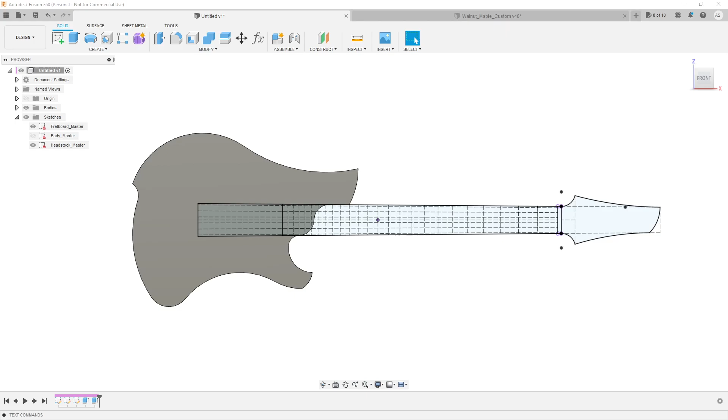Let me pull up my model here. I'm really hoping to get the majority of this body modeled and then start working on the neck transition, this back relief cut and the neck transition. Hopefully I'll have time to do all that.

So what I'm going to try to do, when it comes to shaping the body, is not do quite as much explaining as I normally do, since I've covered a lot of that in the last episode. Hopefully today we can really put some work in and get the body done.

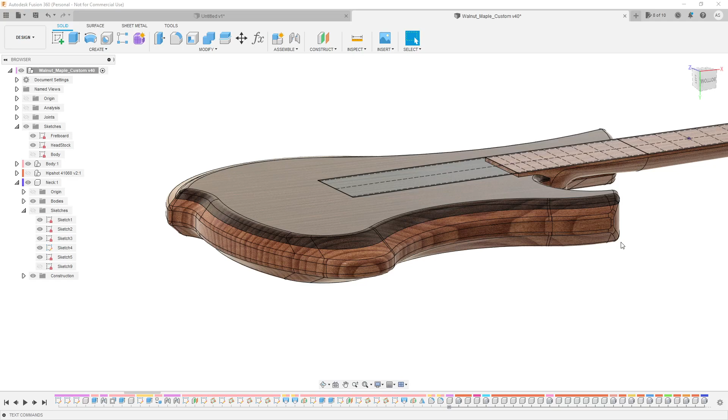The keen-eyed observers among you might notice that my neck is sitting a little bit proud of my body and my fretboard sketch. In episode 2, we actually extruded it directly from the fretboard sketch. Those two are coplanar, and that presents a problem because the neck typically wants to sit a little bit proud of the body, since you'll also have the 1/4-inch fretboard on top.

And that is, if you're using a Hipshot bridge like I mentioned in the first or second video, that'll give you the right string height. So what we actually need to do is come in here and correct that - we need to extrude this down away from the fretboard sketch by at least 1/8 of an inch if you're building the body out of one material.

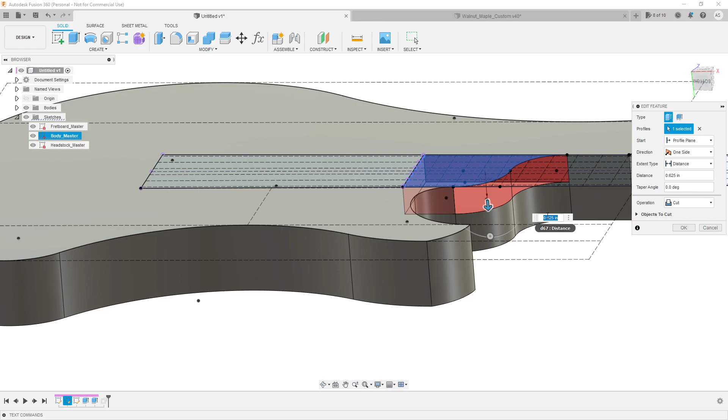And if you're building the body out of two materials like a laminated top, you'll want to do 1/8 of an inch plus the thickness of your laminated top. So if you'd like to just do one style body, bring that down 1/8 of an inch, and then come back to your neck pocket and bring that down an additional 1/8 of an inch. Oop, I messed that up.

So we'll go 0.75. What that does is maintain our 5/8 depth on the neck, but it also brings this down by about 1/8 of an inch, so the neck sits a little bit proud.

For those doing the split top or laminated top, we need to come back to this offset, and we'll go the thickness of the material for the laminated top plus 1/8 of an inch. So if we use a 1/4-inch laminated top, we'll go -0.375.

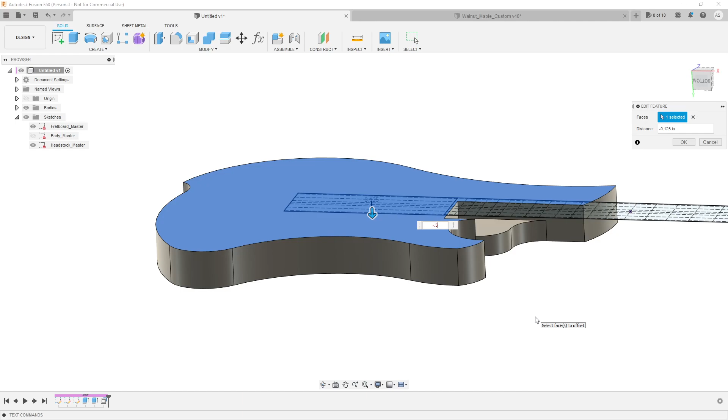Creating the laminated top is actually very easy. We're going to create a new component, so let's go create new component, just hit OK. Then we're going to sketch on this top surface of the body that we just offset and corrected.

Let's click on the main surface, and notice it's not picking up the neck pocket, which is good. So let's hit P for project, bring that into our sketch, hit Q for press pull, or solid extrude, grab that face, and come up the thickness of your laminated top, so 0.25.

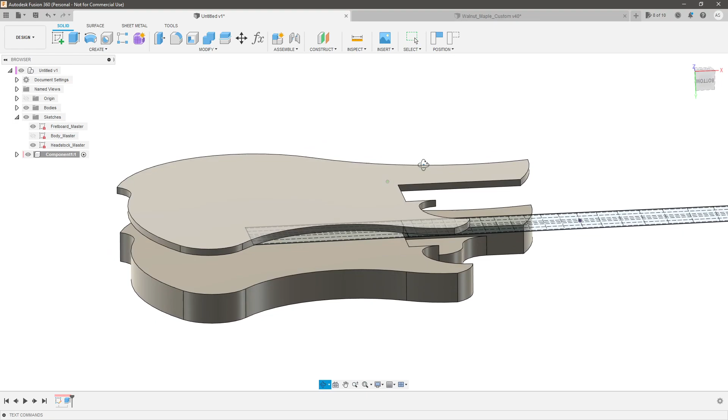Now you'll notice we actually have two separate pieces here, and this already has the shape of the body we created in episode 2. You'll notice, however, that it can move, so we need to make sure that's joined to the body.

Click that face and this face, come up, hit assemble joint, and it'll automatically snap because it's exactly the same shape, it'll snap on center. So we can just hit OK.

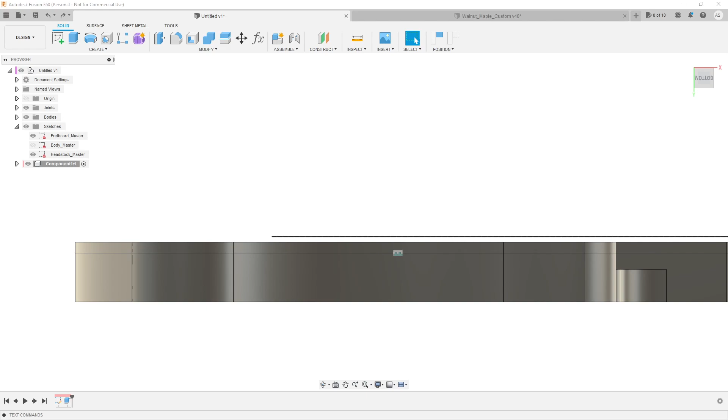So now we've actually got our laminated top, our bottom, and we've got the gap here for the neck. To make things easier going forward, I personally like to apply either a color or an appearance to that laminated top, so when I'm cutting through everything I can clearly identify what portions I'm seeing. Because sometimes when everything's the same color it all blends together and you lose track of the proportions of everything.

So let's hit A on our keyboard and let's grab an appearance. You can apply a wood appearance at this point if you'd like, or whatever material you're using, but I'm just going to pick a color, so I'm going to grab green. Let's go paint green. Now I'll change this later, but what that does is give us some really nice contrast so we can clearly visualize what's happening in the cut.

All right, let's start cutting. First things first, I'm going to lay out the rails. Like in episode 2, I prefer to do the rails first when it comes to the body, but you can draw the profiles if you'd like, if that's the direction you want to go. Like I showed with the 3-point plane method, that seems to work really well for the body, so let's go ahead and do that.

So let me hit sketch, and we'll sketch on top of the laminated top, or on top of your unified surface if that's the direction you went. First, before we do anything, click the surface, hit P, and project that into the sketch. Now let's hit arc, and let's start getting a rough shape in place before we add any dimensions.

So there, those two are tangent, but it doesn't know where it is in space yet. This line can move, this point can move, this point can move, and these two radiuses haven't been defined yet. So let's give this a radius of 5 inches.

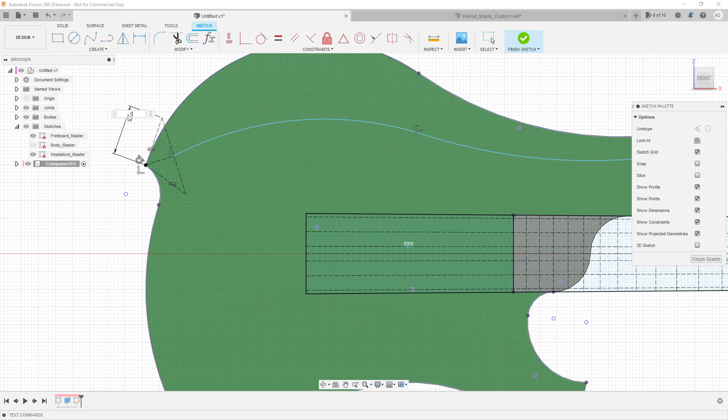That point is going to end directly in line with where these two arcs meet. Let's say if I offset those two, and let's go ahead and give that a dimension of, let's say, 1 inch. And so that's where that line is going to start.

Now we can probably start messing with the constraints here. So let's dimension from this point to this point. Let's do 0.625. And let's give this a radius, let's say 5 inches. I want it to be up a little higher.

That's starting to look pretty good, but where are we missing? It's not black yet. Okay, so this radius can still change, and this point can still move. I bet if I just defined that point, it'll fully constrain everything.

So let's dimension between these two. Let's do 1 1/4. And I bet it can still move down. Yep. So let's dimension between those two, 1.25. Perfect. Okay, so now we have a fully defined top rail.

In order to save the amount of sketches that we're going to make, because we're going to make a lot of sketches in this design, I'm going to draw both rails on the same sketch. You can actually do that and just use a portion of that rail or a portion of that line for the rail. So let me start the next one.

So let's go here like that. Start getting some rough lines in place like we did before. And let's come all the way down to here. Let's delete some of these tangencies real quick, so that way we don't get messed up.

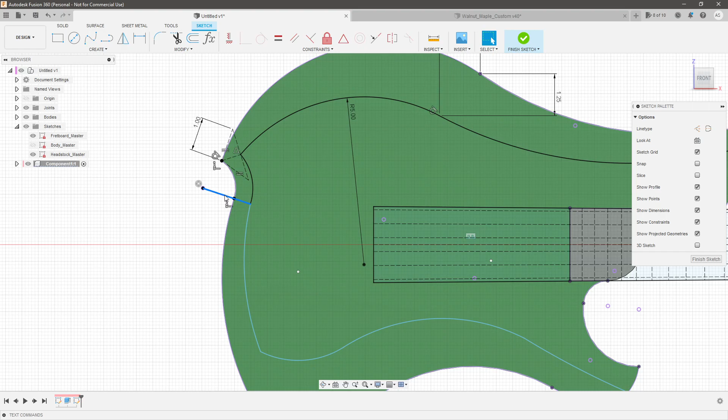So that's actually what I'm going to do, is I'm going to draw a line from here and a line to this point. Make these both construction lines and make those collinear. So that way it's drawing a straight line from the center of that arc through the edge of this one and into the edge of this one. And that's giving me a nice concentric shape there, easy to define, which is nice.

Okay, so let's start working on the bottom. The more that I'm looking at this, I actually am just going to delete these two right here, because I have a feeling that as I start giving those dimensions, they're going to start creating big circles and going everywhere. So let's define our two endpoints first, so that it's much easier to constrain the ones in the middle.

So let's go ahead and make this one concentric to that. Let's bring that up, and let's define the distance between these 2 points. Let's do the same thing we did above as 0.625. And let's make this vertical to here. Okay, so that's fully defined.

Let's make these two concentric and do something kind of similar. I'm going to leave this one open for now because I don't know where I want the bottom of that arc to land. So let's hit arc, and let's draw between here. Let's make sure that's tangent. Yep, that's tangent to there.

And let's draw from here to here, and let's do that, and let's make these two tangent and these two tangent. Okay, so now we kind of have the same situation we had above, where this point can move and that point can move. So where do we want that to fall?

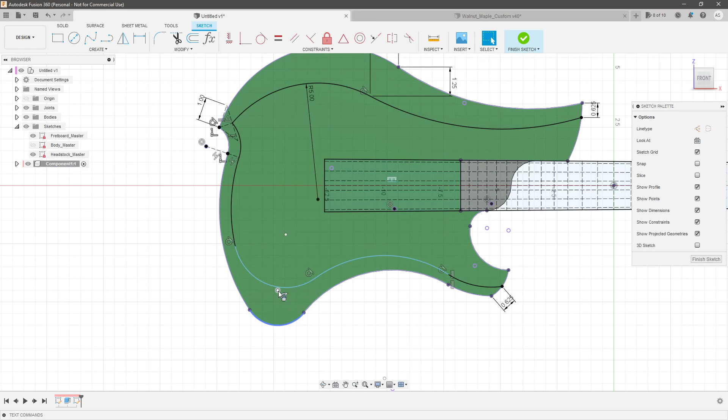So let's find some easy points that we can identify here. Let's make the center of this arc vertical to the center of that arc. And then let's draw a line from here to the edge and make these two tangent.

Okay, so now what we need to do—actually, I changed my mind. So we're going to delete this line. And what we're going to do is we're just going to dimension this radius here. I think that's going to be way easier. So let's give that, let's see, 2 inches. Nope, that's too much. Let's do 1.75.

That looks pretty good, actually. So we've got a nice cut here, and it gets a little bit bigger down at those bottom radiuses and comes in. I'm pretty happy with that.

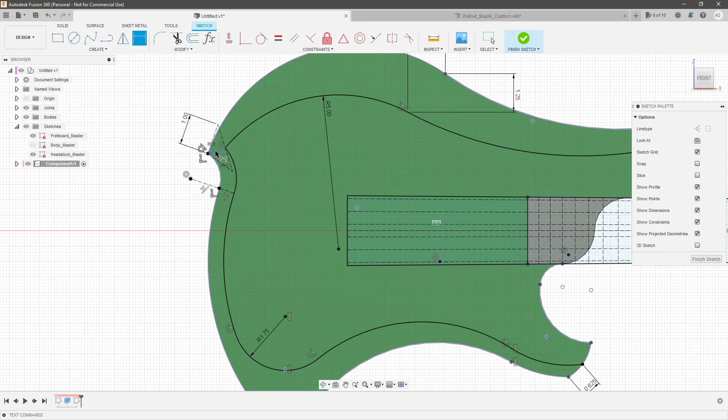So going over this again, I know I rushed through this, and I mentioned in the beginning of the video that I'm going to rush through some of this, but basically I drew some arcs, and I clearly identified where this point that's just in midair is going to land, and then I started constraining everything.

That's going to give me some pretty nice rails to work with. So let's go ahead and hit Finish Sketch. And just like in video 2, we now have a rail here, a rail here, and a rail going all the way around here. That's going to set a nice foundation for us to draw some triangles and cut through.

So the next thing we need to do is we need to establish our plane somewhere lower. So let's go ahead and hit Offset Plane from the top surface.

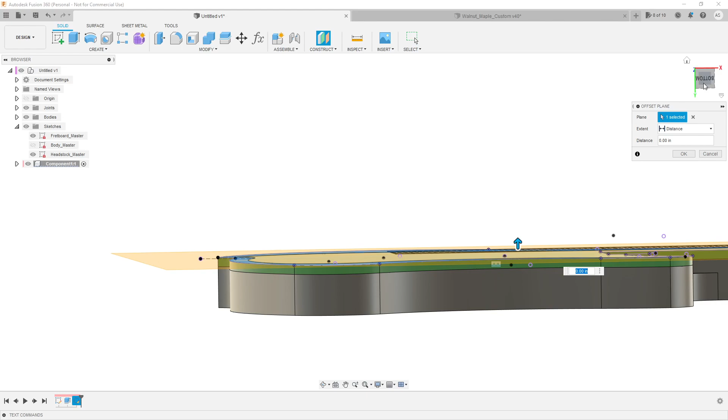And we know since we're doing a laminated top, we want it to cut through both surfaces, so it at least has to be the thickness of the laminated top. Let's actually just double that. Let's go to negative 0.5 inches. Hit OK. Now we've got a surface that'll cut through a 1/4 inch of the base material and a 1/4 inch of the laminated top.

Let's go ahead and hit sketch. Let's click. Let's actually select these lines instead of the face now that we have multiple bodies there. Hit P for project.

And now we've got our rail here on the bottom. So we've got 3 points here, potentially 3 points here. I might need to add another point there. Same thing here, same thing here, all the way around. Probably need to add a point there and a point there.

So let's go back to our sketch. Let's set ourselves up for a loft. Actually, that's the other one. Okay, so let's make sure we add some points.

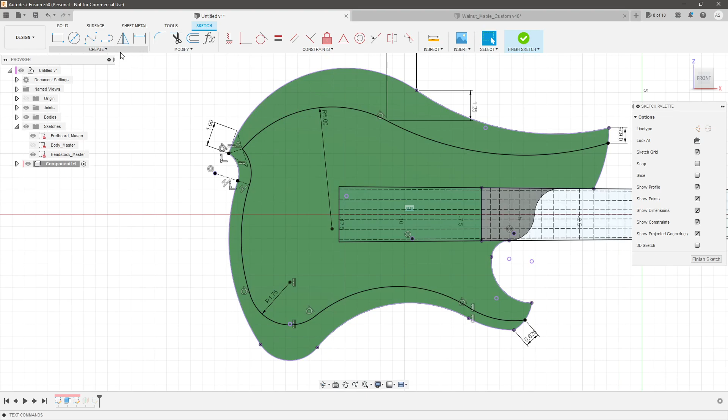This is probably not necessary because you can typically grab off these locations, but I want to add a point to be sure that those are all going to land where I want them to. So let's add a point here. Add a point, no. Add a point here. Add a point there. So we have a triangle here, triangle here, triangle there.

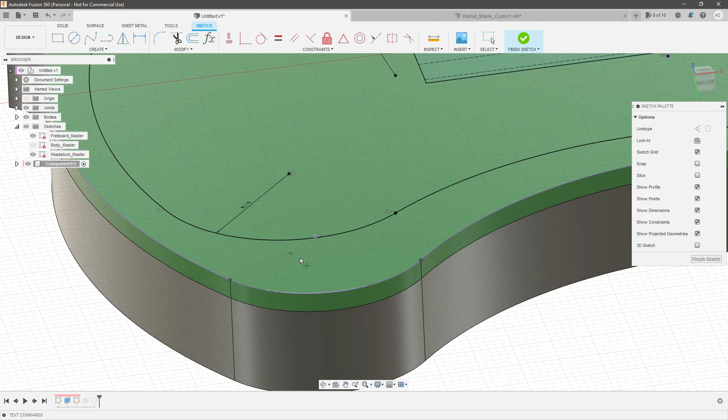This one might be a little tricky where I can add a point to. I'll have to come back to that. Okay, hit finish.

And let's go back to this sketch. And let's make sure we have enough points there. So yep, we've got 1, 2, 3. This one might get a little tricky. We'll have to play with that a bit later. 1, 2, 3, 1, 2.

I didn't add one there, so let's go back. Add a point to here. So now we've got 1, 2, 3. We've got 1, 2, 3, and 1, 2, 3. Okay, let's try that for now. And if we need to come back and fix this one, we can.

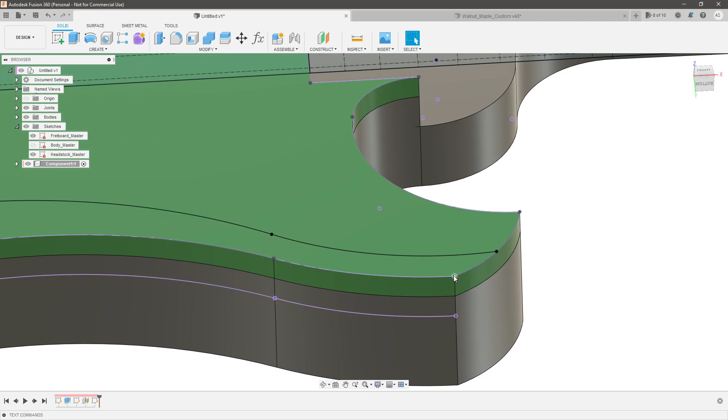So I'm already noticing something. If I create a triangle between these three right here, let's look at this from the top view. Imagine I drew a straight line between these. That's actually going to clip off this little radius here. So I'm actually going to have to extend these lines out a little bit, so that way the cut starts on the outside of the body and goes in rather than starts on the inside of the body, because then I'll have a little bit of material here that never got cut.

So let's go back to our sketch. Actually, the first one. There we go. Create 2 more arcs. Let's draw like that. Tangent and tangent.

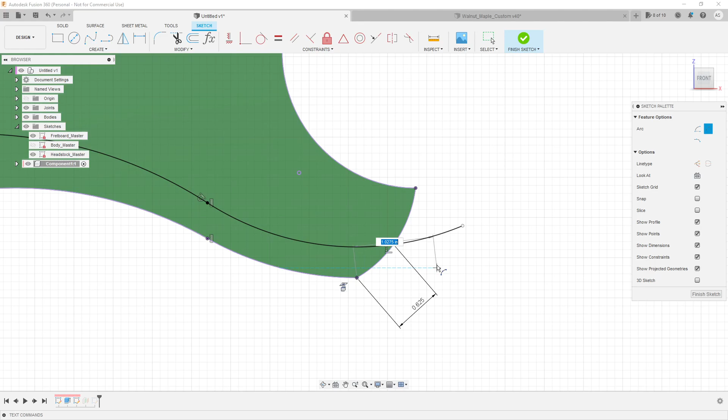Let's make sure these are concentric. And let's make sure this one is concentric. Oh, I'm just going to delete that one and try again. Create arc. Make sure this is concentric.

There we go. And let's go ahead and make these 2 vertical to each other. So vertical. Okay. And then let's define how far away from this surface is that going to be. Let's just say 0.625. Okay.

And then let's come up here. I don't think I need to do it on this one because this one comes tangent, but I'm going to do it anyway just to be sure so I don't have to do extra work later. So I'm going to extend these ones out as well. Come out here. Let's make these tangent and concentric.

Ooh, okay. There we go. Bring that back in.

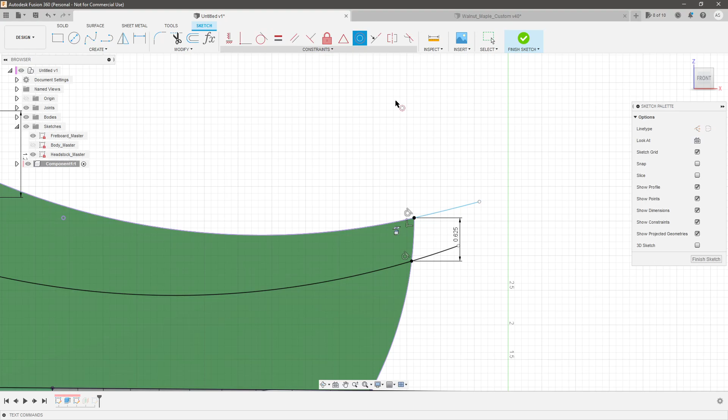These two are tangent, that's already tangent, and concentric. Make these two vertical and define from our shortest point, 0.625.

Now we need to go back to the other sketch and make sure those are also projected in. So project, and project.

That way on the endpoints we have three points here and three points here. I think we're almost ready to start cutting. This might be the most tedious step, but I'm going to go ahead and add in the planes and start connecting all the dots.

Let's construct a plane at three points from here, here, and here. Hit OK. Construct plane through three points between here, here, and here. OK, I'm just going to go ahead and do this to every one of these.

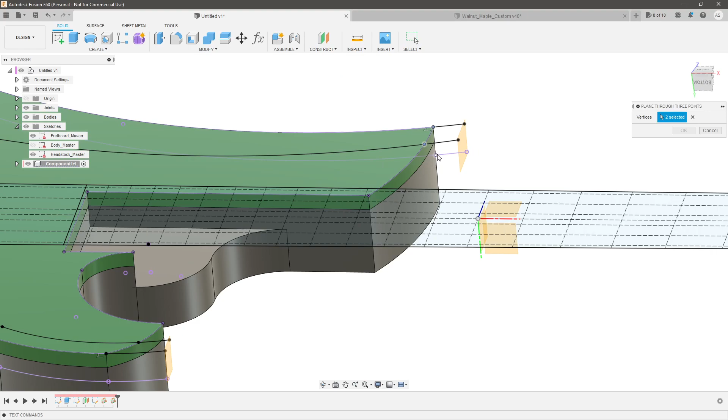Now, you might not actually need to do that. You might try it first by seeing how it interacts without having to do that. But I'm going to go ahead and just draw it at every point where I have a solid three points. So bear with me here for a second.

And through three points, these three, between these three. We're going to skip that one for now, still might have to come back to it later. Through three points here, here, and here.

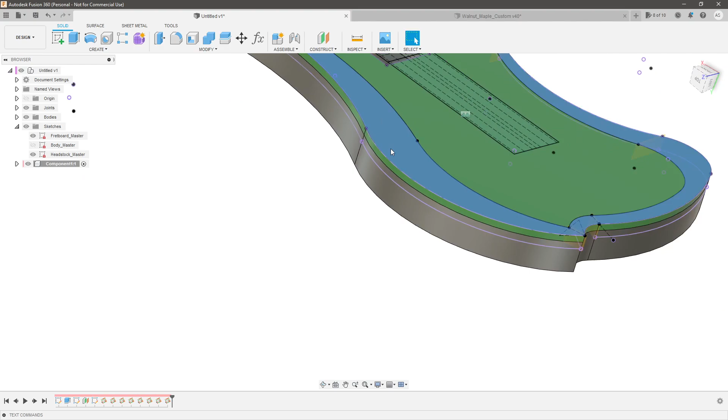Plane through three points here, here, and here. Come around, do these ones. Three points. Oop, undo.

Let's hide the body, it's not letting me select it. Come on. Construct plane through three points here, here, and here.

There we go. Okay, that should give us more than enough to get started, and then we can see how it's interacting a little bit later. So let's go ahead and hit sketch on this one and connect the dots.

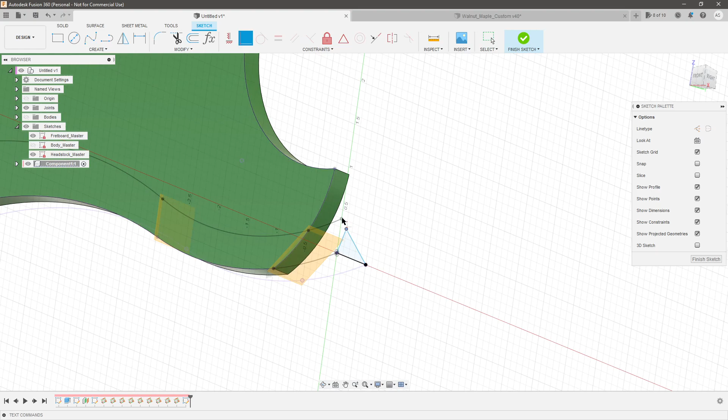There we go. Oh. I apologize if this is going to take a little while. This is the most tedious part of lofting, in my opinion, getting all these connected. So bear with me here. I might do a time lapse.

Phew, that took a while. Thank you for bearing with me on that. So let's go ahead and try to loft.

Now, one thing I want to note before we do this is that I'm going to do this in two lofts, and I want to explain why. So lofts really like to have a smooth trajectory from one place to another. They don't really like to change directions abruptly.

You'll notice I've got straight tangent lines going all the way through. They're all connected up until here, and then it goes a vastly different direction. That's a good indicator for me that I need to do this in two lofts.

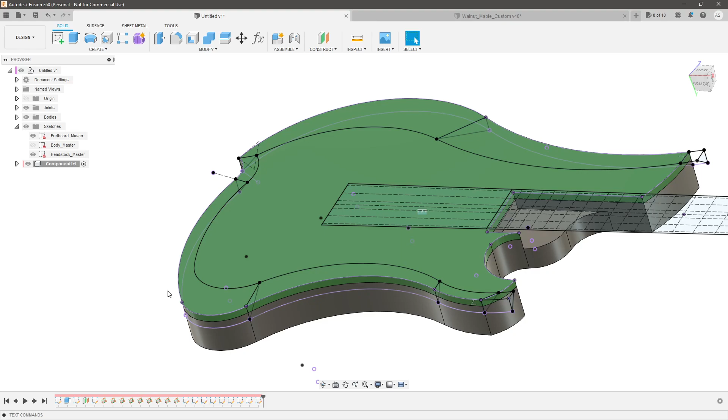There are ways to do that in a single loft, but generally not when you're trying to follow a path like this. If you were to do it that way, you'd probably want to use this whole surface as one of your profiles and then draw construction lines down vertically to here and loft between those two surfaces.

That's totally doable, and that's a valid way of doing this. I personally prefer this method because I feel like I have more control over the shape. So let's go ahead and try to set up our loft.

But first, let's come up here. Let's hide our bodies. Actually, we need to show this, but we need to hide that body. Okay, create loft. We want to go from this triangle to this triangle to that triangle to this one.

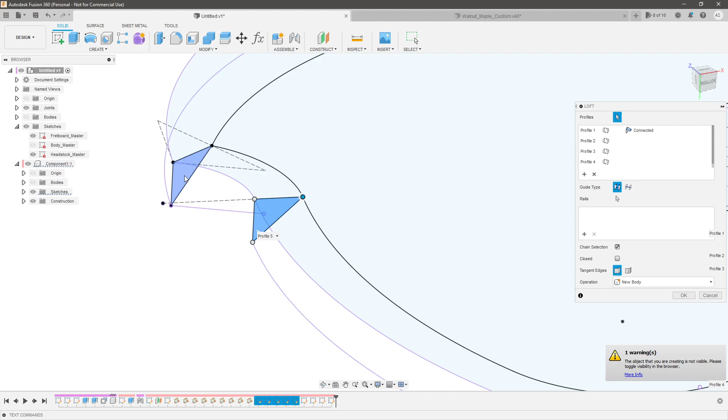Remember, we're doing these in order from here up until there. Okay, now I just noticed something that I missed, and this happens quite a lot when you're doing lofting. I don't have an arc coming from here to here. Somehow that did not get projected in.

So I need to cancel. I need to go back to that sketch, which I believe is right here. Let's see. Where did I insert my plane? Okay, it's this sketch right here. Somehow this line did not get projected in.

Okay, good. So now my rail goes all the way to the end. So let's go back and let's loft this again.

Create loft from here to here to here to here, all the way around, to here, to there. Okay, now it's not finished yet.

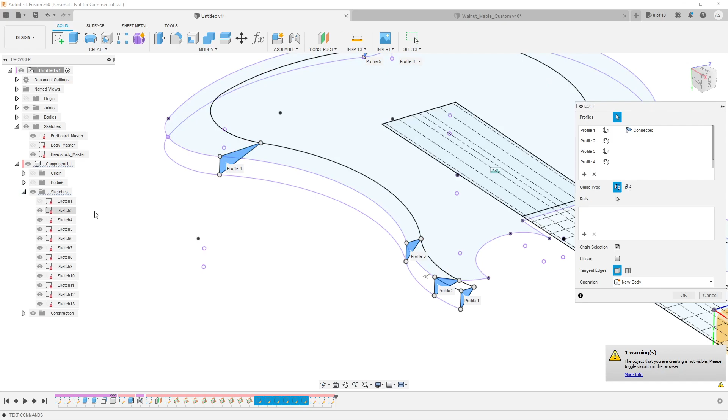We've got to add our rails. So let's go guide type, rails, not center line. And let's keep chain selection on for now and see what happens. So let's go... No, it's not liking it.

Why is that not grabbing it? Oh, I'm just an idiot. Okay, chain selection. Nope, not gonna like it.

Let's do that one, that one. Now it's telling you it's missing between these points. So that one, this one, and that one. Okay, that one should be good.

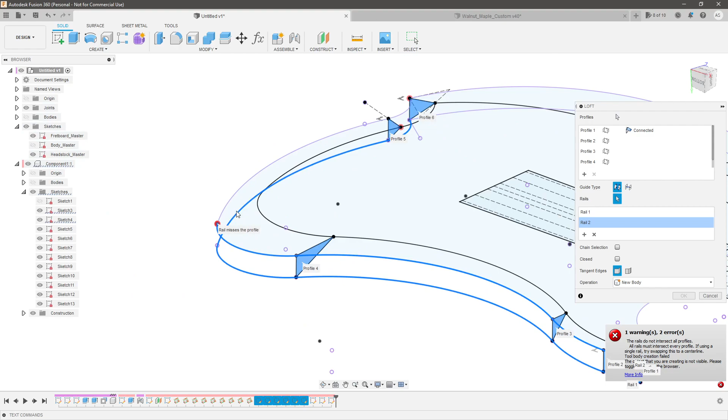So now let's grab a new rail right here, here, here, here, here, and here. And let's grab a third rail and go from here to here to here, here, here, and grab that last one. Okay, let's bring our bodies back.

That's looking pretty good. I might have done this on the first try. Okay, hit OK, let's let this compute.

Okay, let's take a closer look at this, make sure we didn't miss anything. So we've got a nice clean triangle there. Do we have any cusps anywhere? That actually turned out really nice.

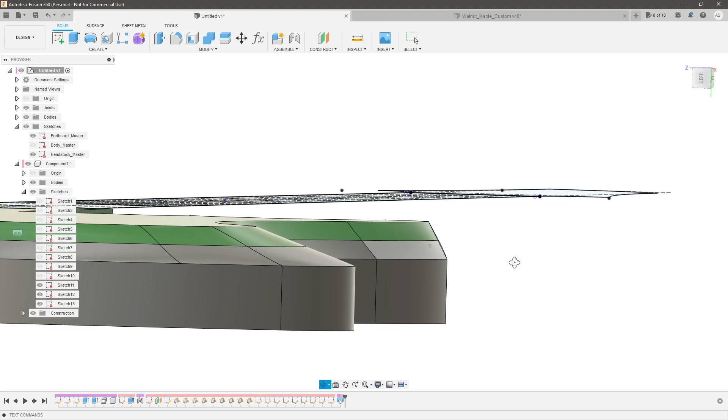Okay, we got a little one right there. I'm not too concerned about that, to be honest. I think that's because we didn't have another triangle forcing this into shape. So you can see here I had a straight line. This one's a little squiggly. I might go back and fix that a little bit later, but I think I'm going to move on for now.

Okay, so let's do the second loft. So let's hide these bodies again. And let's go show all these sketches.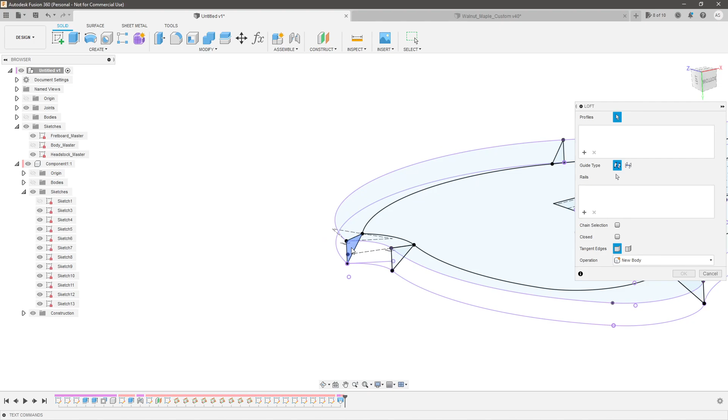And let's loft number 2. Create loft from this triangle to this one, to this one, to that one.

And let's do our rails. So from here to here to there. Rail number 2 is from here to there to there. And rail number 3 is from here to here to there. Okay, I think that's going to work.

Let's go unhide our bodies. Make sure everything's cutting. Yep, it's creating a nice crisp line there. This one's looking pretty good. I think we did all right. Okay, let's close it out.

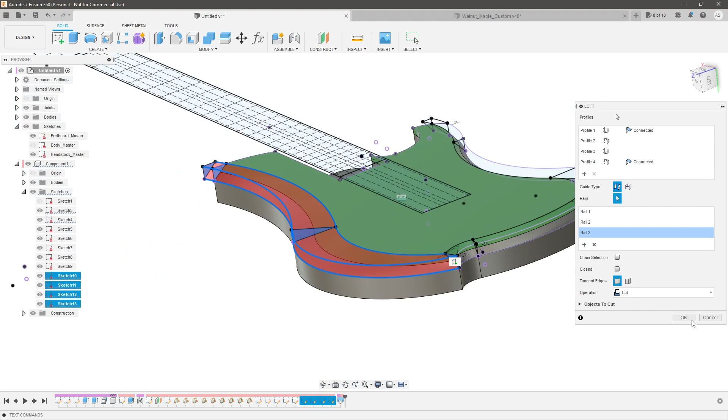Let's hide our sketches, let's see what we've got. Awesome. So yeah, I think long term I'm going to have to go ahead and fix that line because I didn't define it, so it's warping a little bit around that corner. You can see that curve there. But everything else that I defined looks really nice, so I'm happy with that.

So let's go ahead and project that. Actually, not project, that's the wrong term. Let's mirror these lofts to the back side so that we don't have to do our work twice. Now some designs will have unique cuts on both the back and the front. In my particular design, I wanted to have the same cuts on both sides, so it would thin it out at my shoulder area and thin it out at my leg, without it being a big swooping cut like you see on fenders and stuff.

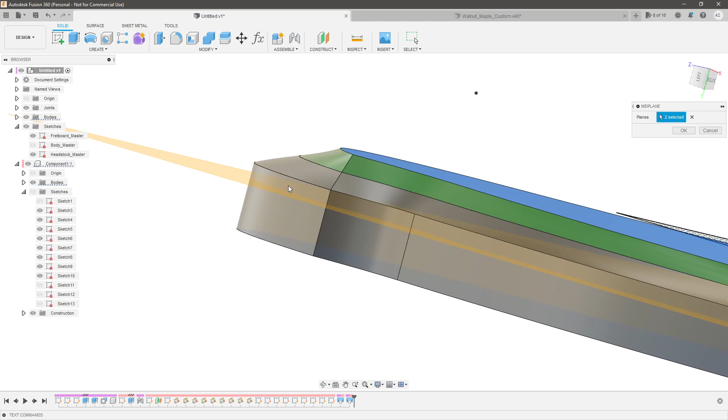So what I'm going to do is create a mid plane. So let's go construct mid plane between here and here. Okay, you can see it's a little bit lower because we went down a quarter and a quarter. It looks like we've got maybe 3/16 or something in between there.

So let's hit OK. And what I want to do is take these two lofted features, click both, hold shift and click both of those, come up to create mirror, hit mirror plane - that's going to be the mid plane that we just chose. And you can see what it's going to do. It might be kind of hard to see here, but it's going to take those exact cuts and mirror them to the other side of the design.

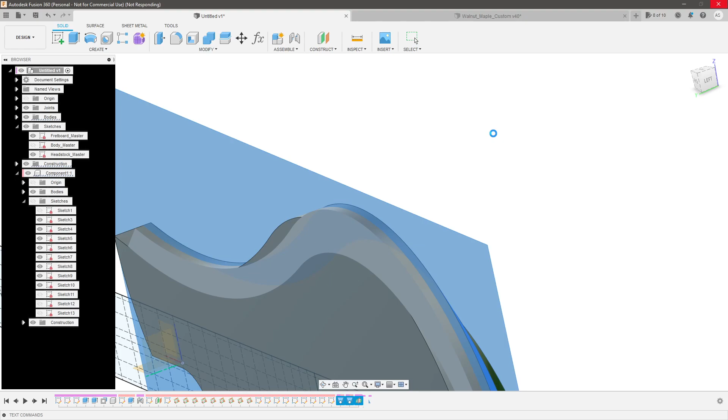So let's see, I'm going to change this to optimize so it makes sure it cuts. Let's see what happens. I'll be right back with you. My computer's frozen.

2 hours later, all right, I'm finally back. That took forever, and I think I might have figured out why my computer kept freezing. So sometimes when you do a mirror, there are different types of compute options, and optimized is typically the fastest because it just kind of mirrors the faces over. I think that was the wrong choice in my case because I actually had two competing faces, because I had the laminated top and the body, and it was trying to add those faces to the other side.

Whereas when I did adjust, it computed almost right away, but it took me probably 12 times restarting Fusion 360 and I finally got it. So sometimes Fusion just does not like the answer and cannot solve it, or what you're trying to do and can't solve it. That's how I ended up doing it. It finally worked, and I finally got those relief cuts on the backside. Let me hide the construction plane and you can see what happened.

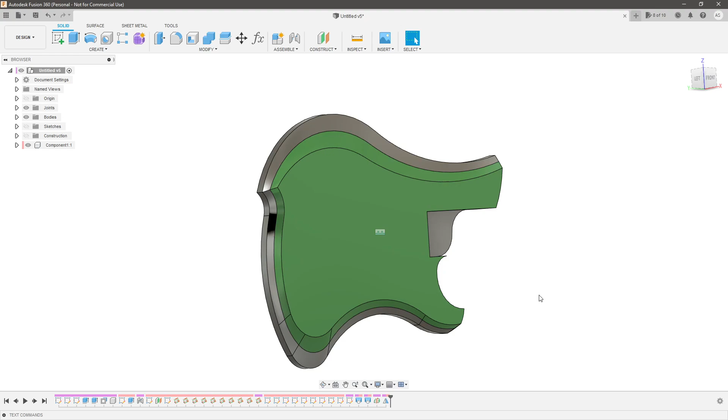I want to point out a good lesson here: always save your documents. The program crashed and I had to restart it, and since I hadn't saved, I had to go back in and redo my lofts. Thankfully I didn't have to redo all my sketches, but I fixed that squiggly area we saw before and cleaned up some other sketches. I finally got it working, and here we are.

So now we have the compound curves I was looking for, the relief cuts in my body. It's identical on both sides, so I only had to do the major work on one side. We've got a pretty decent looking body now. Remember, we've left this back edge open for when we start the neck, but so far I'm pretty happy.

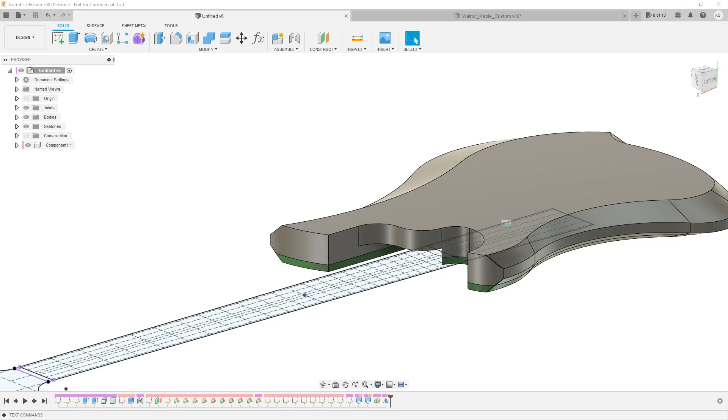So now I think we've got enough of the body in place to really start working on the neck. We've left this back area open so we can do that, and we haven't put any fillets on these shapes we've cut, so that we still retain all our harsh edge anchor points that we can anchor this neck transition to.

If we applied the fillets - let's say I rounded over all of these, this one and this one - give it a quarter inch round over. You'll notice I lost my anchor points there, they're now rounded over. I actually want to retain those right now because I want to be able to connect to this dot or connect to that dot.

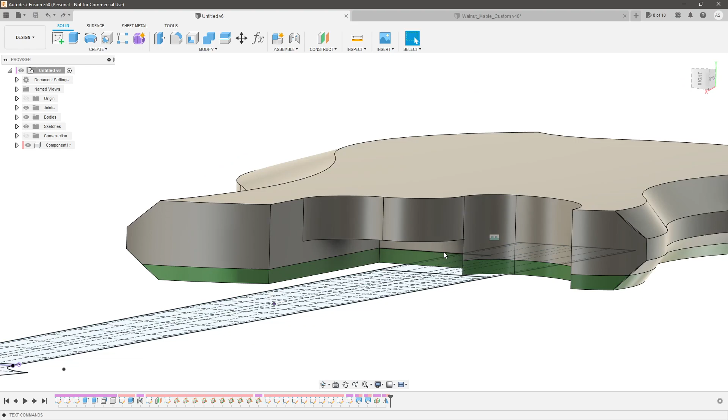So where do we start? The first thing we need to do is establish where the neck starts and where the portion we're modeling ends. I know my neck starts all the way in the back of the pocket, and the part we're modeling right now needs to end wherever the last piece is touching the neck.

If you have a wing on your guitar unlike mine, that comes out like a fender, you'd place yours at the last point it starts the neck. But in my case, since my wing touches the neck all the way out to here, I need to start my neck right here.

So what I'm going to do is open up my original master sketch of my fretboard. I probably need to remember which fret that's on - so that's 1, 2, 3, 4, 5, 6, 7, 8, 9, 10 in from the back. I want to unmake that a construction line - turn it into a solid line.

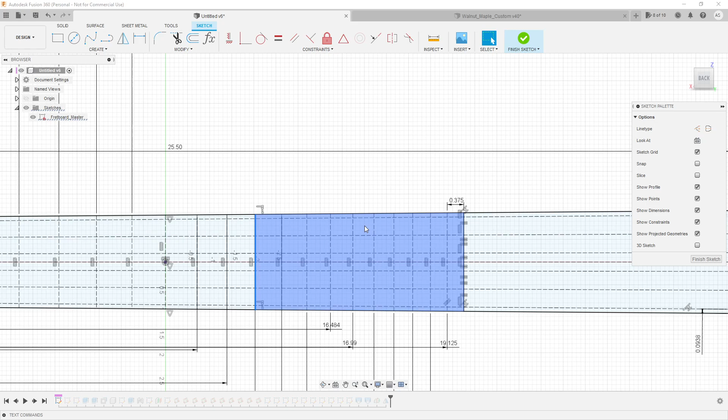If I select that line and hit construction, that creates a section or sketch I can now highlight. If I turn that back, it highlights the entire section because the construction line wasn't interfering. But if I turn that off, now I can highlight that section.

If I come back to my model, you'll notice now right here I've got a perfect square that follows the contour of my body. So if I extrude that up from right here - let's go to object, up - you'll notice now we've got a block that we can cut out.

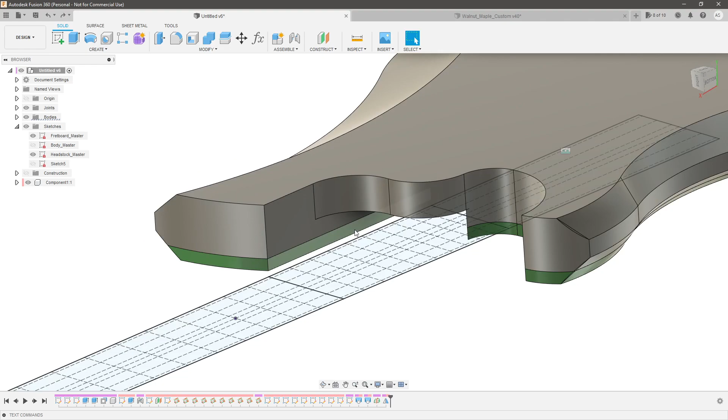I did make a mistake there - we need to create a new component first, since we don't want to add a body to the body. So let's hit create new component and name it neck. Inside neck, we'll highlight this and extrude it up to that surface. Now we've got our block that we can cut out.

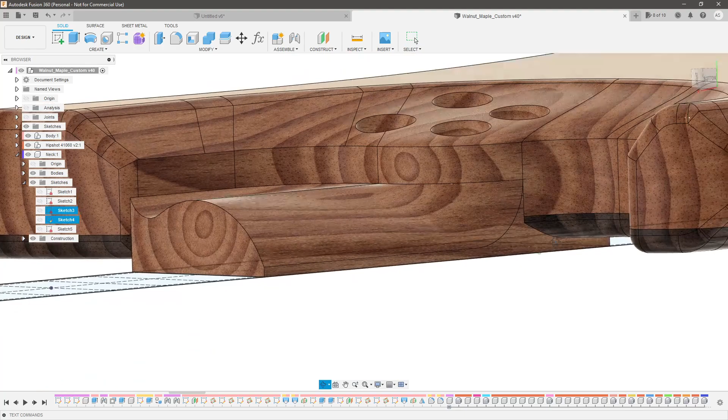Now we need to start envisioning what that transition is going to look like. Let's go to my other design - in mine I've got a step, and I don't want the transition between these two surfaces to feel uncomfortable. I want that line to go tangent right here, so there's a nice smooth transition from all angles. If you didn't have a step there, you might approach it a little differently, and I'll go over that - let's try the step version first, then I'll show the other one.

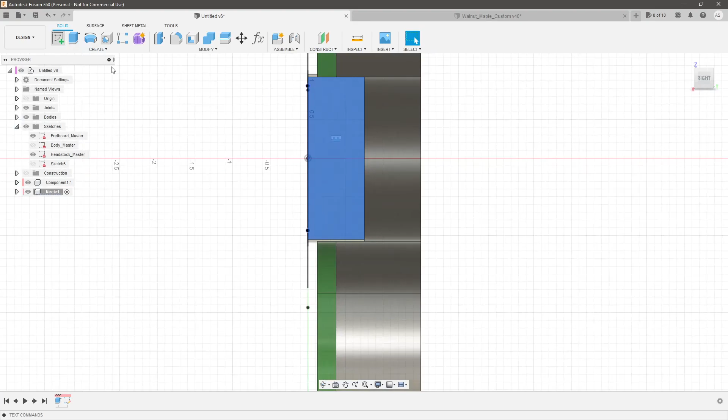So what I want to do is open up our fretboard sketch again. I want to sketch on this surface. Let's change that orientation. And what I want to do is create an arc, or whatever shape you want your neck to be.

Let's project in that face real quick. Arc here, and bring that up. Now I'm going to tell this arc and this line to be midpoint, right? So you could make that lower, because that means there's going to be no taper to the neck from here to here. So if you wanted to, you could make that a little bit lower.

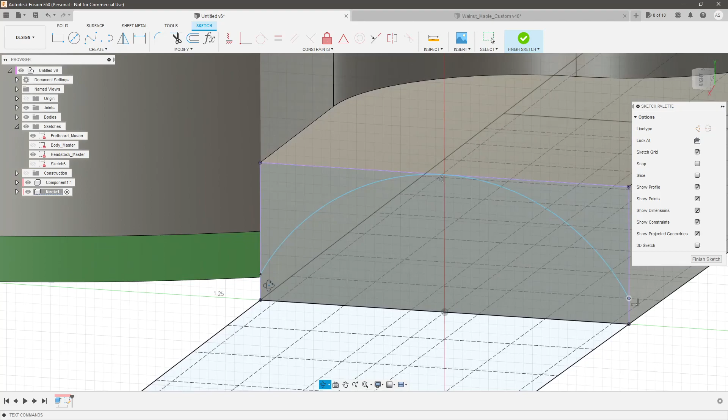I personally chose to, just for the simplicity of the loft, leave from here flat with no taper. So I made that midpoint. Let's make these two horizontal. Oh, they already are. Okay. And then where do we want that to connect to? I want that to connect to the top of this laminated top. Let's click that, project that dot in, make those coincident. Okay, now I've got a fully defined arc.

So you can see that this is really what if I were to extrude that out, the neck starts to take shape. Now we're not going to do that yet because we're focusing just on the transition.

So what I want to do is take this section out, right? So if I cut this back, let's say I just cut that back all the way to there. You run into two problems. A, because the neck has a taper to it, you've got a clip here, where it clipped off part of the material. And B, we need it to stop only at that line.

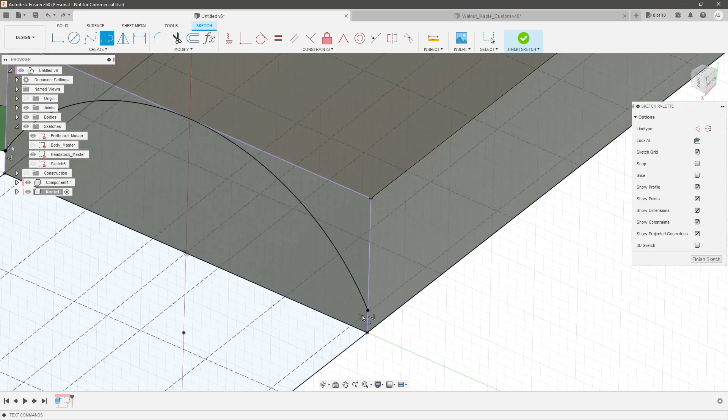So bring in the lofts. What we're going to do is now finish that sketch. Actually, let's connect these two right here and these two right here, like that. Hit finish. So now we've got our main profile, and we've conveniently got the first profiles that we want to cut from.

So now what we want to do is sketch on this surface, and let's give ourselves a midpoint here, like that, and find the midpoint, draw a line out, and we want it to connect to that center of that arc.

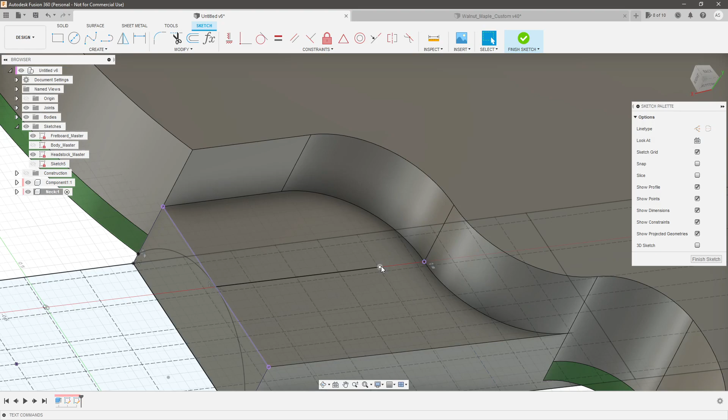Now, again, this depends on your design. You may not have that feature right there, but if you can manage to design it where you have that feature, it makes this much easier. So project in that point, and I want to connect that point. And I want to project in... no, I do not want to project that in right now. I'll show you why in a minute. And then let's just finish that sketch.

So now I've got one rail. So here's my triangle. I've got one rail here. I have potentially another rail here, but I'm going to need to change that a little bit. And then I don't have a rail here.

So let's go ahead and sketch. Oop, wrong surface. Let's sketch on this surface. Reorient ourselves here. I know I can turn that off, but sometimes it's useful.

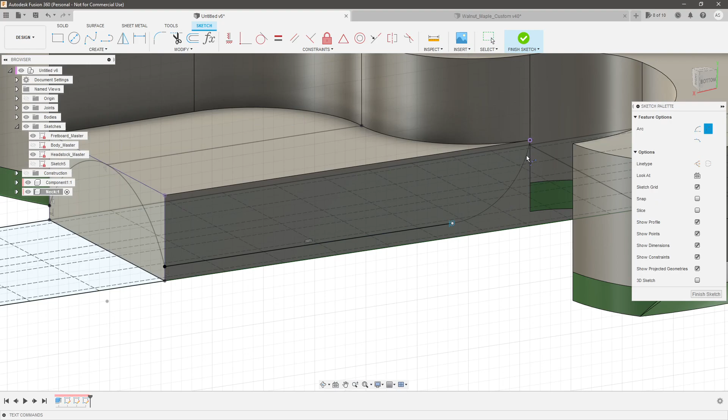So what I want to do is project in this point, and project in this point. So we want this to continue back to here, and then we want an arc between here. I'm going to just draw it like that for now. Let's project in this line, and we'll make these two tangent. And then let's make these two tangent, so it's a nice smooth transition.

Okay, so what I've got is this triangle here is going to wrap, this point right here is going to wrap all the way around and then curve up to that point, leaving a flat spot on the side here so it can continue all the way back into the neck pocket.

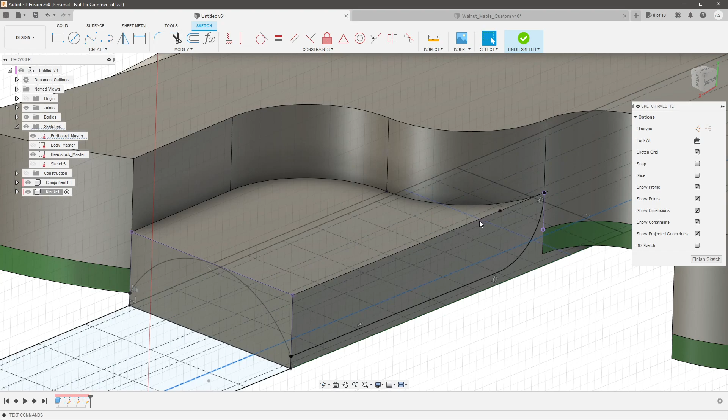And then all I need to do is find a similar shape that I can use, right? So we have a triangle here. We've got 1, 2, and then a curve. Well, if we imagine that we've got a curve here, we can have a triangle connecting between here and here and have the same shape with the same amount of points. So that's going to be great.

So let's go ahead and hit finish, and let's sketch. Oop, I had something selected. Move that around. Let's sketch on this surface again.

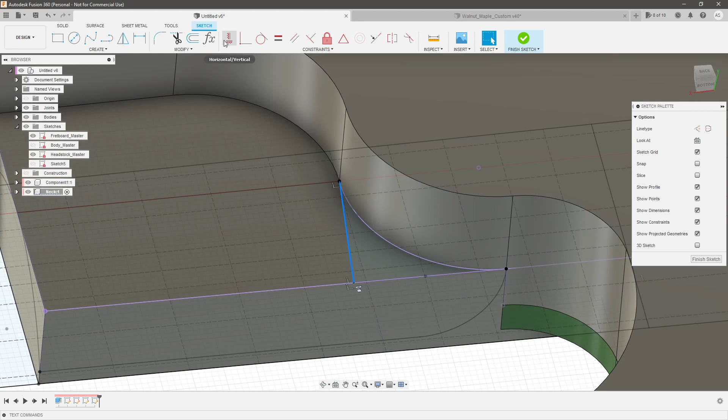This time what I want to do is project in that curve, and connect here to here, and project in this line. So that will take care of that clip, because it's going to actually connect to that side wall. Make that horizontal. Okay.

Now we've got, let's see, let's draw a line here to here. Actually, let's do that on the first sketch and see what happens. Or not the first sketch, the second one. Actually, no, I do need to do it on that last one. Let's draw a line. I know I've projected this in, but I want this line to terminate at this sketch. So I'm drawing in a manual line there. So I've got a rail here, I've got a rail in the middle, and I've got a rail on the side that loops up.

You can see, let me hide the body, and I'll show you what's happening. Let's hide the fretboard sketch for now. So you've got this triangle shape. It's going to follow these lines, and these two are going to stop here. This one's going to keep going all the way around.

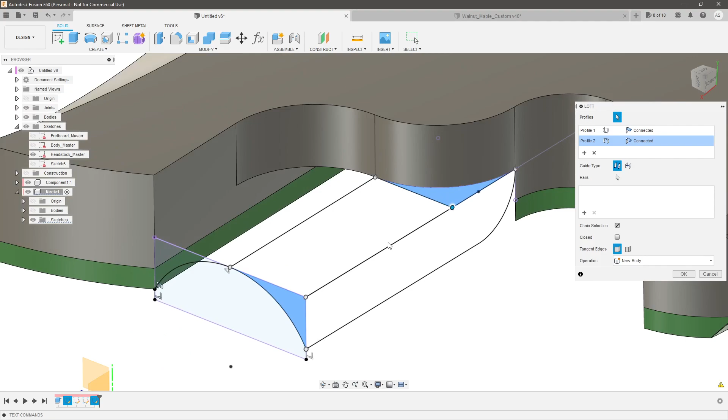So if I loft, let's go create loft from here to here. Let's show our body again. It's going to do its automatic version first. And let's choose our rails. We want this rail, we want this rail, and we want this rail. So what it's doing is this triangle with a curve is sweeping up, and the top is stopping here and the bottom is sweeping up. If I hit OK, you've got a near perfect transition.

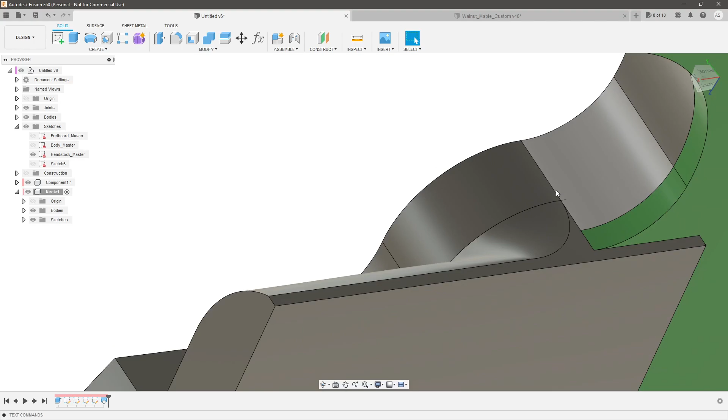Now, it's not going to be perfect here because there's still meat that it's connected to, but it is perfect at this area right here. And you can add a fillet here if you want to even smooth that out more. But I can't tell you how long it took me to figure that out.

I worked on that neck transition trying 100 different ways to do precisely that, and it was deceptively simple. It was staring me in the eye, but I couldn't see it the entire time, and I finally figured that out. That is one smooth, clean face that goes right up. I'm extremely happy with that.

As for the other side, this again depends on your design. So what you can do, in my design, is come this arc and then keep the neck going up into this body right here. So I could actually have it sweep in and come like that.

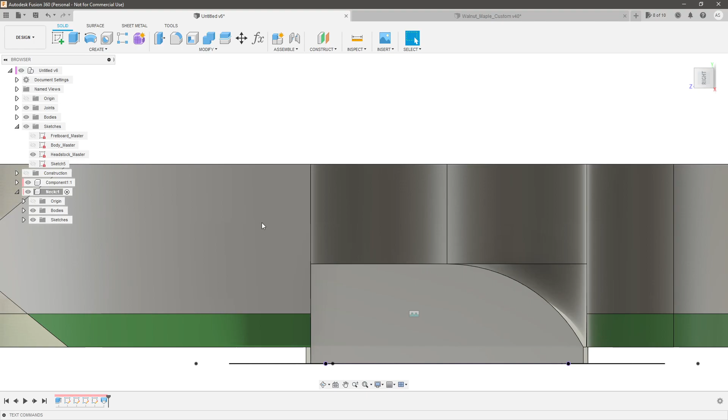Now, what I did in mine, because I decided to leave a step there, let me pull up that loft, I'll show you. So this one's a little interesting because I did it a little bit differently. I only had 2 points. But in this case, this is one of the few cases where I don't need an equal number of points.

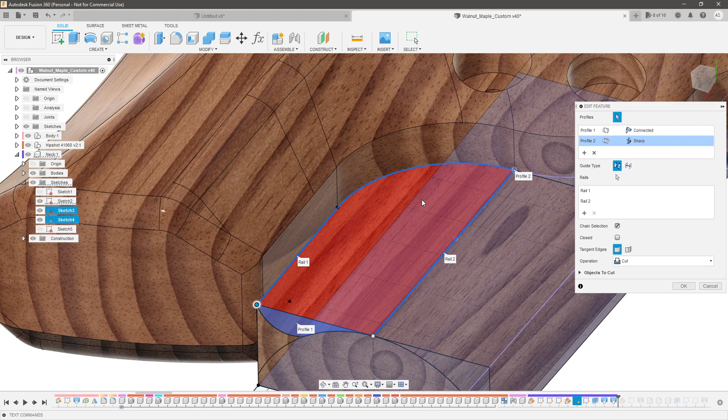Because I had my surface here, and then I had this line connecting to that dot, and this line connecting to that same dot. So it all curved to a single point. So this shape swept up and then started rotating in, and then it all merged to a single point. And you can do that. That actually worked really well for me. And so that's how I cut out that shape.

But let me show you how you could potentially do something else. Let's try this here. Let's say you wanted to have that clean sweep from here all the way in. I'm not going to go all the way through it because it's going to take a significant amount of time, but I can show you the basic principles, and hopefully by now the rest will start to make sense.

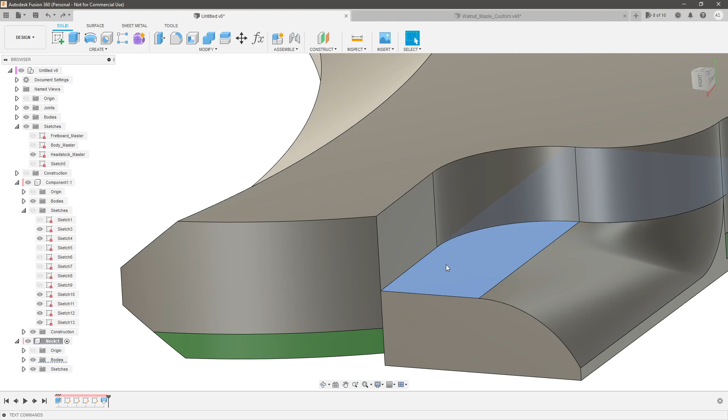So I prefer to do lofted cuts when it comes to this rather than extrudes. Now you can do extrudes, but when you try to do those first and then cut afterwards, it can be annoying. So what I'm going to do is extrude this up so I have something to cut from, because that's going to taper up. So let's go ahead and sketch on this face. Let's project in that surface. Actually undo. Let's project in the lines instead.

Project like that. Now I have a surface that I can extrude. So let's go up to this object. Obviously this looks terrible right now, but what that's going to do is it's going to give us some meat to cut from and make sure that our transition is smooth.

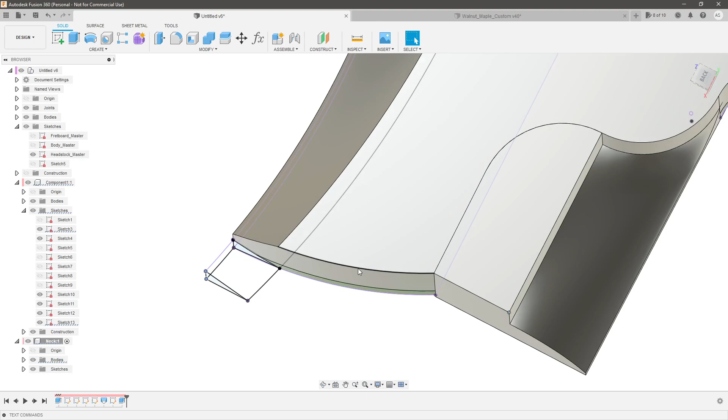So what I can do is I can sketch on this surface. Now if I were to actually do this on this particular guitar, I'd have to create some kind of plane between here and somewhere out here, right? So I could maybe even bring in these sketches and create a plane between, undo. Hold on, sorry. I could potentially create a plane between this point and that point, right? So that way I could have something that's outside that surface. Otherwise, we're going to run into that clipping issue again.

But for the sake of time, because this video is already getting pretty long, let me show you a quick example. So if I draw on this surface, and then I project in this line and this line, let's create an arc. Let's say from here to here, right? And let's project in this line, make these two tangent, and then connect the dots up here.

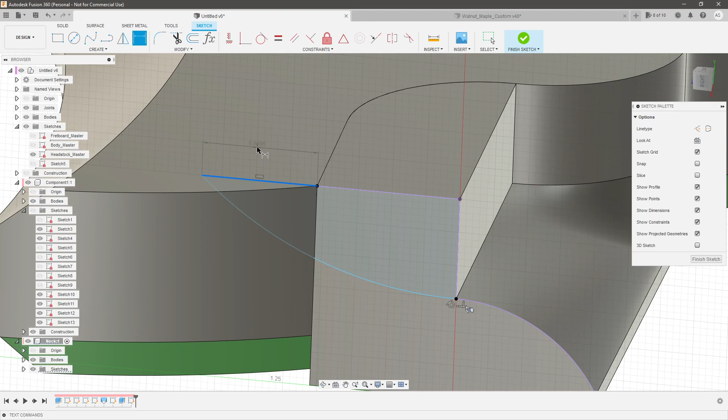Let's see. Oh, that needs to be horizontal. Okay, so that's constrained. So what's not is the distance here. So let's give that a distance of, let's say 1 inch. And then this is not constrained for some reason.

That's fine, figure that out in a little bit. But so I've got my first one there. That's going to cut through. So if I took that shape and I cut through, let's just pretend for a second. You can see that this has a perfect transition from here up to here. So the question is, how do we wrap that around, right?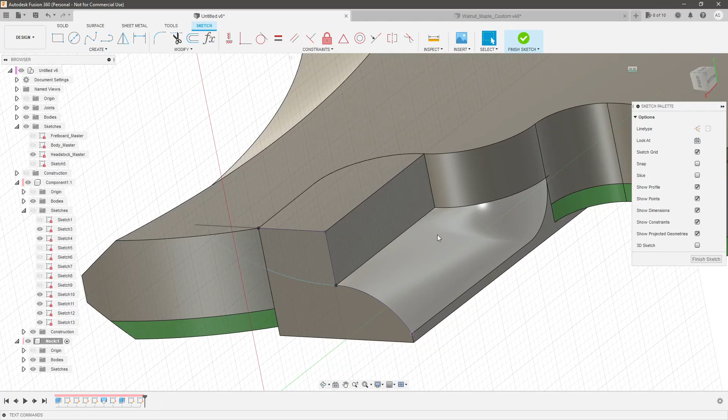So again, just for example's sake, if I sketch on this surface, I've already got a similar structure right here. So project that in. Let's do this, do an arc from here to here. Project that in so we can make that tangent to there. And let's make that 2 inches.

Right? Hit OK. So now we're going to loft from here to there. And you could theoretically, if you did this right, the right way, you could loft from here to here, here to here, here to here, and all the way around, getting smaller as you go around.

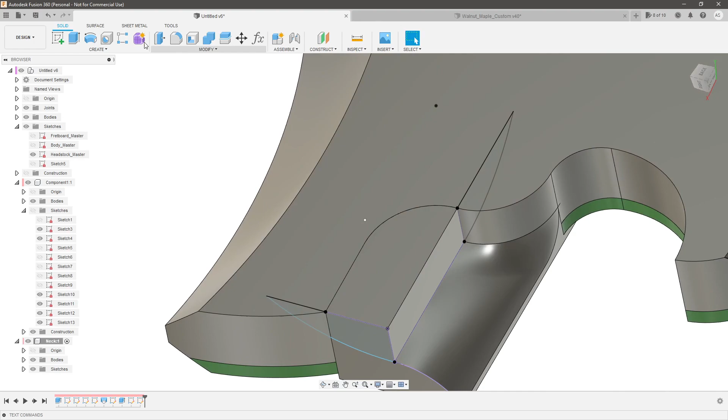So now let's create our third rail. So let's project in that sketch line, draw that out, and create an arc between here and here. We need to project that in.

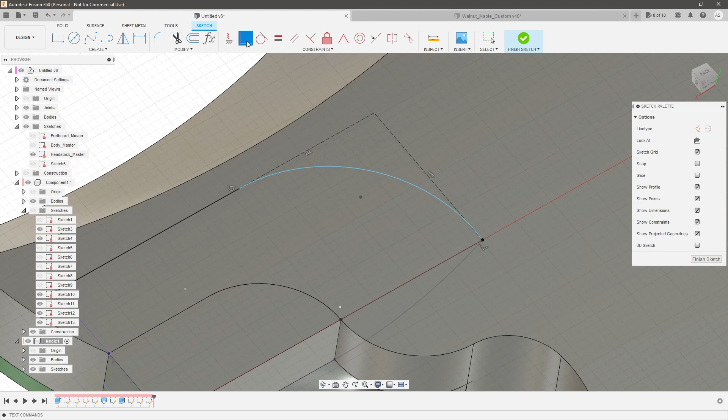Create an arc. Now let's make these two tangent. And I need to make this tangent somehow. So let's create ourselves a triangle and we'll make those construction lines. Just make those horizontal real quick. Oop, I accidentally drew a second line. There we go. Okay, so those are defined.

So now the question is, where does this line go, or what's this radius, right? So let's give that, let's see if we can do a 1.5 inch radius. Actually, that's awful. So let's do a 3 inch radius. That looks much better. In fact, we can even go a little larger.

So if that were to go all the way around here, you can see how you could draw that line. So this should give you enough of an example. So let's hit finish. It looks like we've got 1 rail, we've got 2 rails, and now we've got 3 rails. So let's take this, hide that body.

Let's go create loft, hide that body. We want to loft from here to here, show the body again. Invalid direction. Let's see if it changes when I add the rails. There. Yep. Okay, and then we want this rail and that rail. Okay, that's throwing an error.

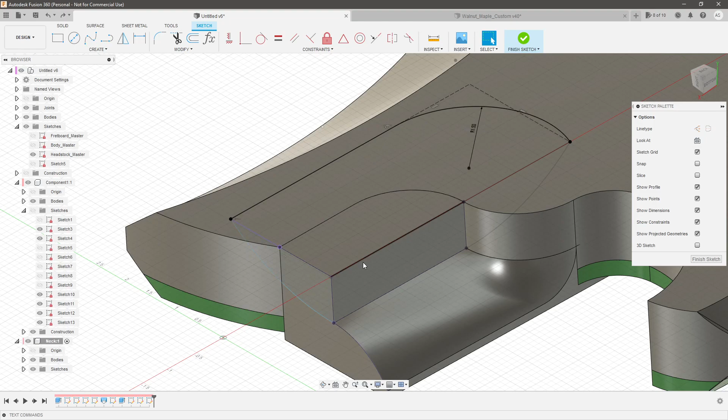Let me see if that has to do with that line that I didn't constrain very well. Let's go here, go back and fix that. Let's delete that, just draw one line out. Pardon me here, sorry. This is what happens when you're dealing with lofts, they can be really annoying sometimes.

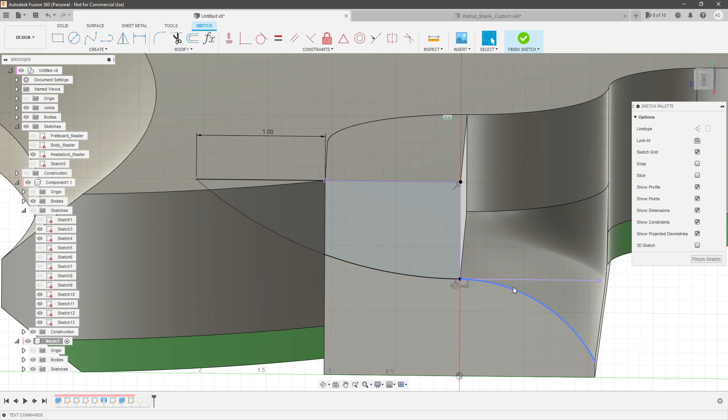And let's actually project this line from way back here, so that way we've got a nice straight line. Because remember, it only projects in what's visible from this plane. And let's see if we make that tangent. There we go, now we've got a fully defined line. I think it just didn't like how it was interacting with this curve.

Let's hit that. We lost one of our sketch points from there. Let's fix that real quick. Just a second, delete that. There we go, okay. Project that line in. Make sure that's coincident. Make sure that's horizontal. There we go, okay, that's fixed.

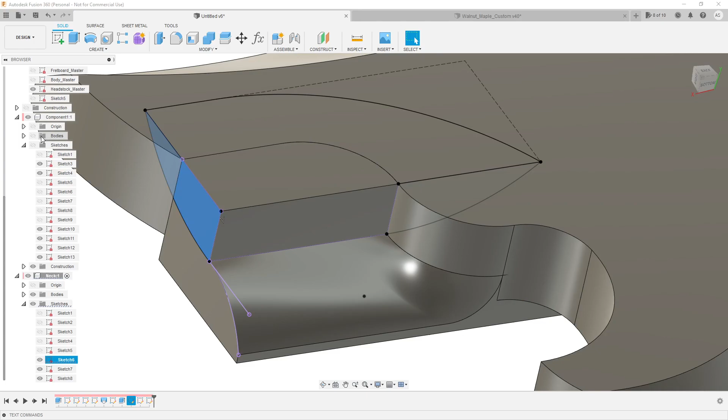And let's make sure that line is good too. Let's try the loft here real quick. Bodies. Or let's go create loft. Hide the bodies. All right, that's still throwing me errors. Let's see what happens.

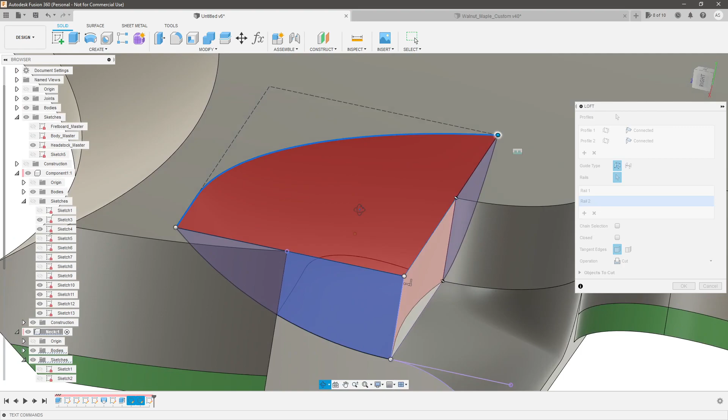I did this just a second ago before I taped this video, and now it's not working, of course. Maybe you can still see. I apologize for it not working. But basically what it would do is it would cut that shape out right there, and you could wrap that all the way around there. But yeah, let's undo that one.

Like I said in previous videos, lofting can be infuriating sometimes. And if you're not really careful with how you prepare your sketches and your lines, you can run into issues like that. I was clearly trying to rush through to give you guys an example, and I messed up somewhere. Offline, I spent about an hour trying to figure out where I messed that up and couldn't replicate it. So I apologize for not being able to show you that example right now. I will probably show you some of that when it comes to the headstock. And if not, and you guys still have questions about that, I will make a dedicated video later on how to do that and make sure I do it properly.

So let me go ahead and show you my solution for my guitar, and I think that's going to be fairly common for a lot of people. In fact, I think this right here is going to cover most people's bases on it when they're designing guitars. But let me show you that little cusp that I did right there. So let me open up that original sketch of the neck profile.

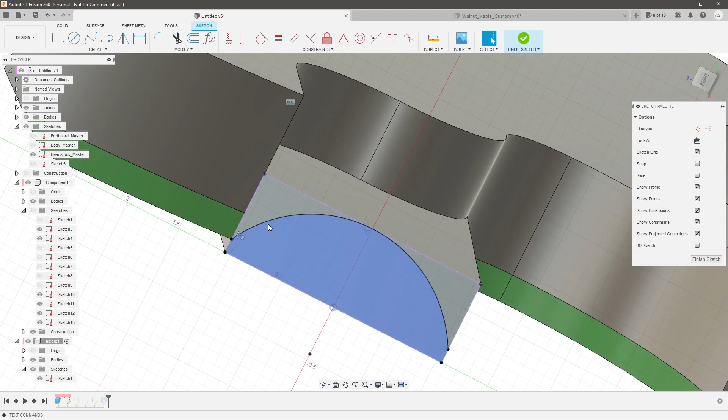And what I want to do is create an arc from here to here, and then an arc from here to there. And I want those two to be tangent. That looks pretty good right about there. So what is that? 0.25 and 2.5. Nope, that needs to be midpoint to there. Okay, there we go.

So now I've got that, and I've got my rails already, because this body or this line right here can act as a rail, and so can this one. So let's take this shape right here, create loft, add a rail. Let's not do chain selection. From here to there and there. Cut. Nope, I messed up again because I'm trying to rush through this.

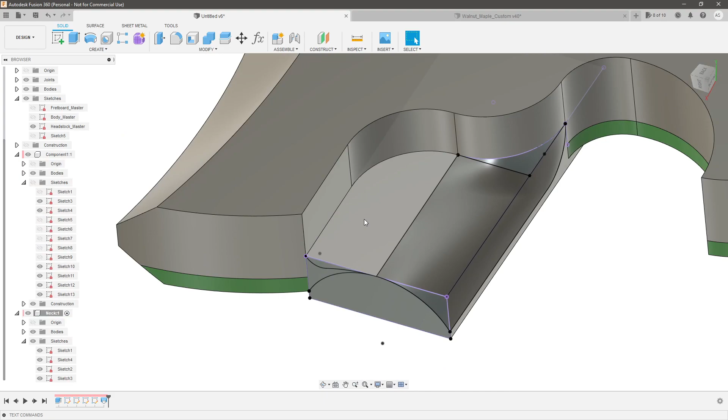So let me sketch on this, project in these lines. I'm going to draw, just going to project in this one, and I'm going to draw from this point to this point. Make sure I'm diligent about connecting all my dots, and let's do that instead.

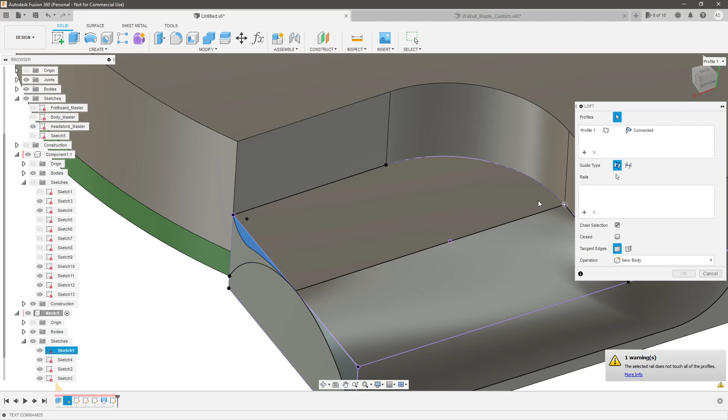So create loft, that rail and that rail. Oh, we need to select our second profile, which is that point. There we go. Now we do our rail from here to here. You can see it's trying to warp itself. And then from here to here. And hit OK.

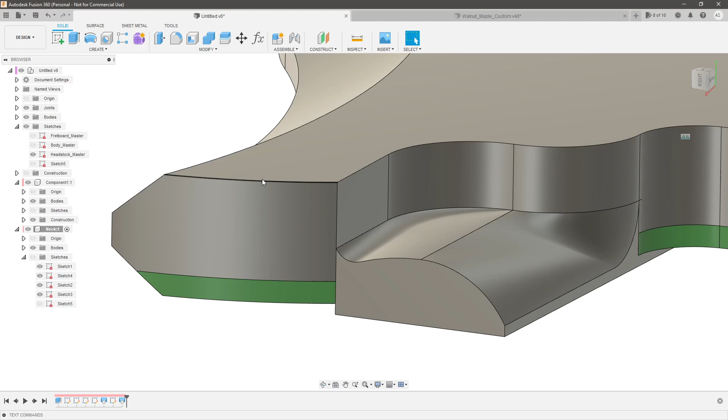For me, it was that simple. I mean, granted, it took me forever to get there. Let me hide my sketches so you can see it more clearly. So I've got a clean transition from here up, and I've got a clean transition with a little bit of a relief for the finger, so it has something to grab onto. And then what I can do when we contour the back of the body, or the back side, the relief cut right here, I can draw a triangle from here, making it tangent to that right there, and sweep that all around this entire thing and get a really nice contour.

So I apologize again for messing that up, but such is life with lofting, and this video is dragging on too long. So I hope that what I've been able to show you has given you some really good insights as to how to approach the neck transition. And I'm sure many of you will have many questions about your particular models, and I'll do my best to answer as many of them as possible.